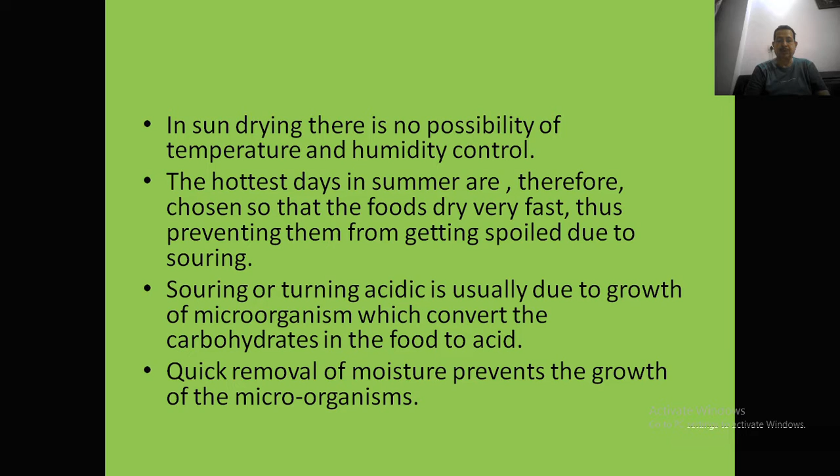Dehydration means the process of removal of moisture by the application of artificial heat under controlled conditions of temperature, humidity and air flow. In this process, a single layer of fruit, whole or cut into pieces or slices, is spread on trays which are placed inside the dehydrator.

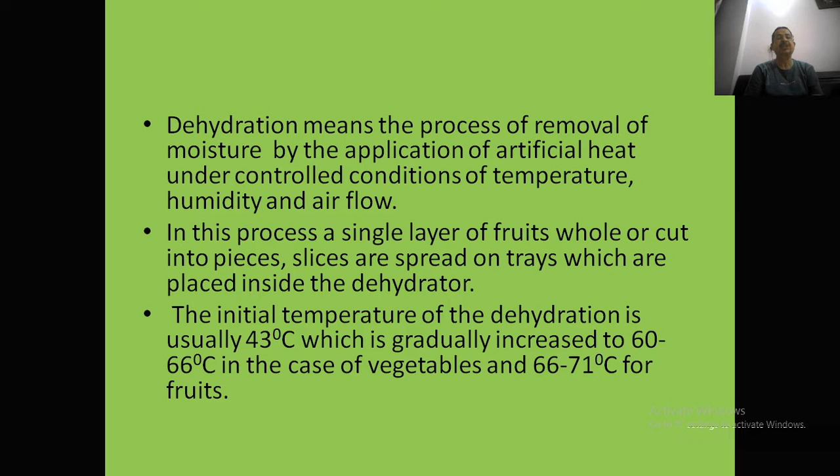The initial temperature of dehydration is usually 43 degrees centigrade, which is gradually increased to 60 to 66 degrees centigrade in case of vegetables and 66 to 71 degrees centigrade in case of fruits.

Then, advantages of dried and dehydrated foods. Dried foods are more concentrated than food preserved in other ways. Second, they are less costly to produce than canned or preserved foods because of lower labor cost and because no sugar is required. Next, due to reduction in the volume of the product, it requires less space.

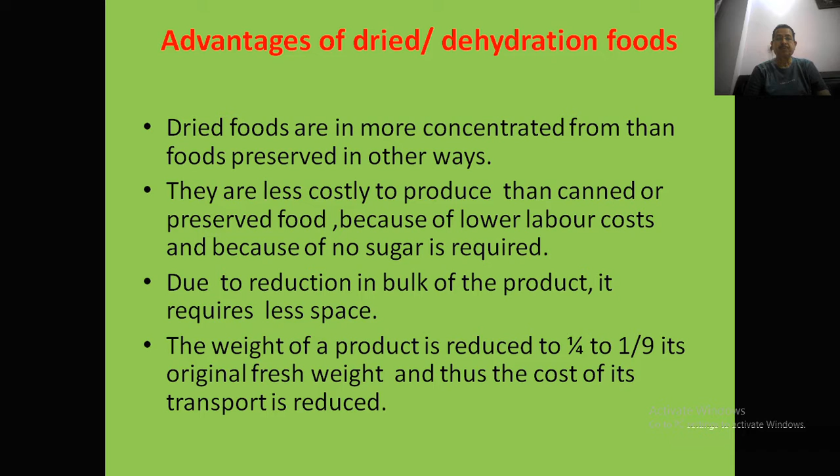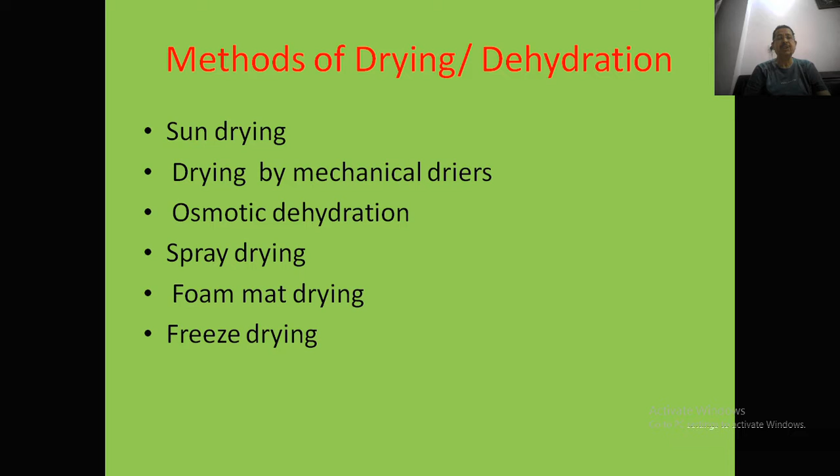Then the weight of the product is reduced to 1/4 to 1/9 of its original fresh weight, and thus the cost of its transport is reduced. Then the different methods of drying and dehydration are: sun drying, drying by mechanical dryer, osmotic dehydration, spray drying, foam mat drying, and freeze drying. These are the methods which are generally used for fruits and vegetables.

First is sun drying. This type of drying is used in tropical and subtropical regions where there is plenty of sunshine and practically little or no rain during the drying season. Sun drying is in direct or diffuse sunlight, that is, shade drying.

One of the earliest methods of food preservation, it is still used for the production of dried fruits and also for drying nuts. It was originally limited to fruits high in sugar content, which when harvested would dry naturally without hazard of loss from fermentation and molding.

Then the flow chart of the processing of drying of fruits. First is selection of the fruit. Fruit should be fully mature and ripened, free from blemishes, spots, and any disease and insect infestation. Then they are thoroughly washed. Then peeling is done by removal of the outer skin by lye peeling, mechanical peeling, steam peeling or other methods. Then preparation: they are cut into suitable size if required.

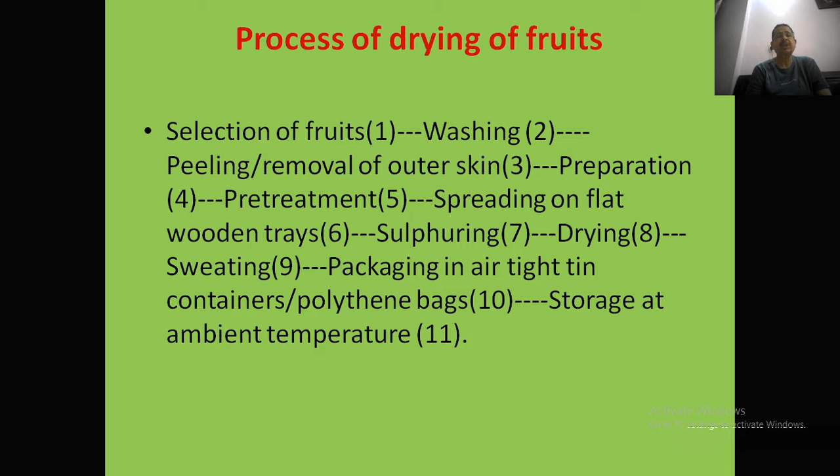Then sweating, where the moisture of the fruit is equalized. Then packaging in airtight tin containers or polythene bags. Then storage at ambient temperature. This is the flow chart of the drying of fruits.

First, lye peeling. In case of pre-treatment, lye peeling means dipping the fruits, particularly grapes and dates, in a 0.5 to 2.5% boiling caustic soda solution for 0.5 to 2.5 minutes depending on the nature and maturity of the fruit.

Hot lye loosens the skin from the flesh by dissolving the pectin. The peel is removed easily by hand. Any trace of alkali is removed by washing the fruit thoroughly in running water or dipping it for a few seconds in 0.5% citric acid solution.

Then sulfuring. Sulfuring is only done in case of fruits, not for vegetables. Sulfur fumes act as a disinfectant and prevent the oxidation and darkening of the fruit on exposure and thus improve their color. This phenomenon is generally seen in sliced fruits, which darken due to the oxidation of the coloring

matter. Sulfur fumes act as a preservative, check the growth of mold, etc., and prevent the cut fruit pieces from fermentation while drying in the sun. Vitamins in sulfured fruits are protected.

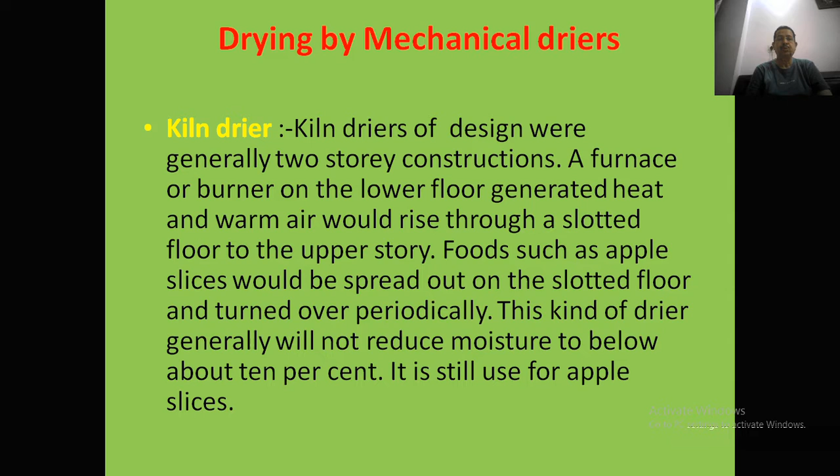This kind of dryer generally will not reduce the moisture to below about 10%. It is still used for apple slices. Then second is the cabinet, tray and pan dryer. Food may be loaded on trays or pans in a comparatively thin layer, up to a few centimeters. Fresh air enters the cabinet, is drawn by the fan through the heated coil and is then blown across the food trays to exhaust. In this case, the air is heated by the indirect method.

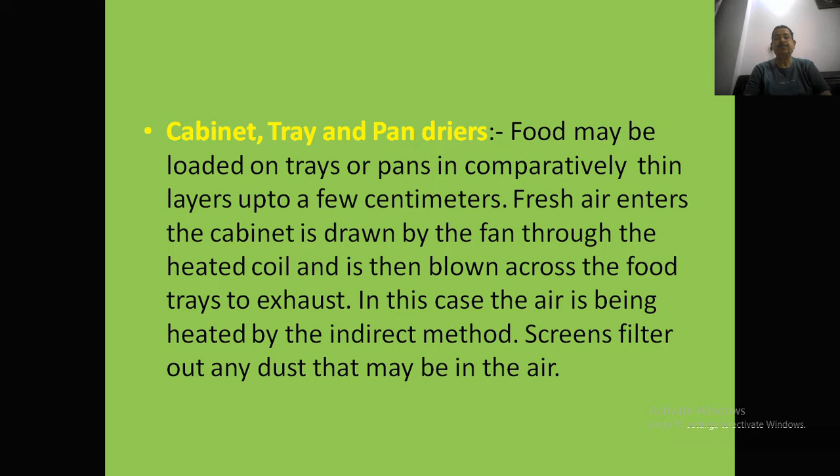Screens filter out any dust that may be in the air. The air passes between the trays in this design. The air is exhausted to the atmosphere after one pass rather than being recirculated within the system. The moisture-laden air after evaporating water from the food would have to be dried before being recirculated. It will soon become saturated and further drying of the food would stop.

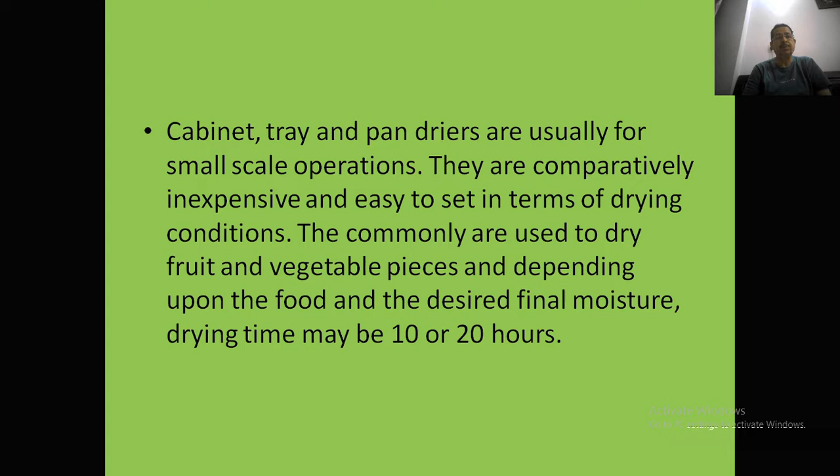Cabinet, tray and pan dryers are usually for small scale operation. They are comparatively inexpensive and easy to set in terms of the drying conditions. They commonly are used to dry fruits and vegetable pieces. Depending upon the food and the desired final moisture, drying time may vary, maybe 10 to 20 hours.

Then next one is the tunnel and continuous belt dryer. A main construction feature of the tunnel dryer has to do with the direction of airflow relative to tray movement. The wet food carts move from left to right. The drying air moves across the trays from right to left. Its significance is that the air, when it is hottest and driest, contacts the nearly dry product, whereas the initial drying of the entering carts gets cooler

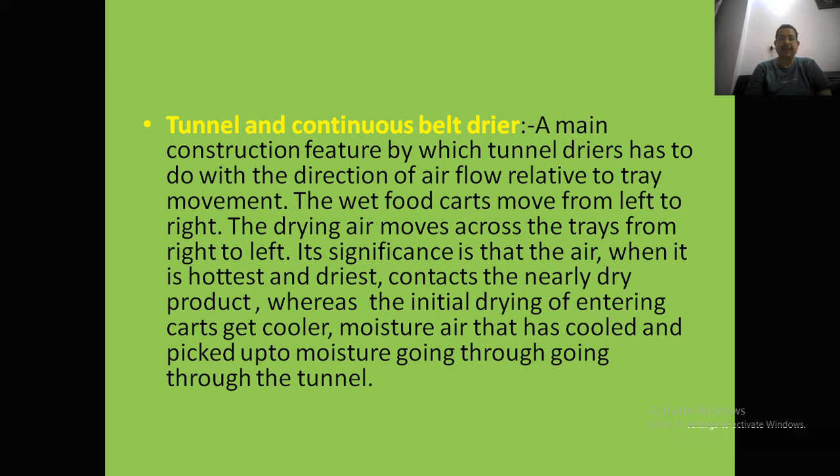moist air that has cooled and picked up moisture going through the tunnel. This means that the initial product temperature and moisture gradient will not be great, and the product is less likely to undergo case hardening or other surface shrinkage leaving wet centers. Further, lower final moisture can be reached since the driest product encounters the driest air.

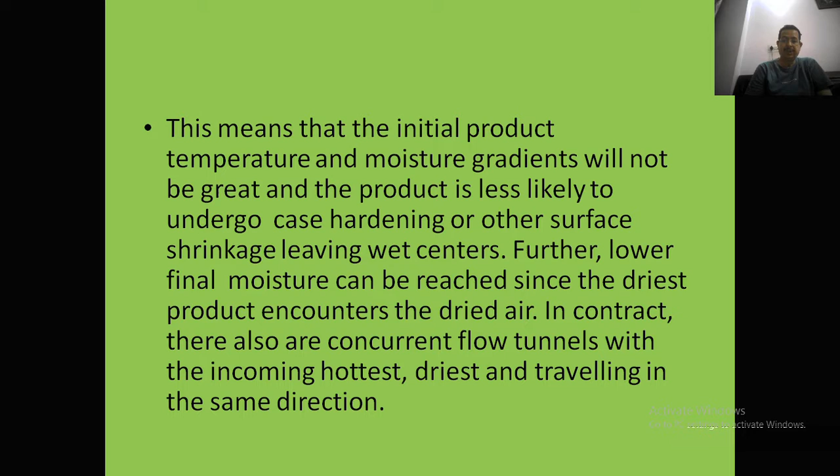In contrast, there also are concurrent flow tunnels, with the incoming hottest, driest air traveling in the same direction. In this case, rapid initial drying and slow final drying can cause case hardening and internal splits and porosity as centers finally dry, which sometimes is desirable in special products.

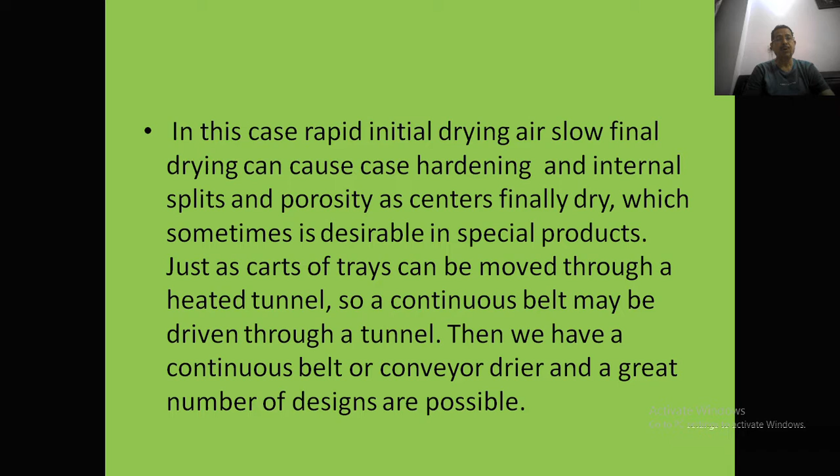Just as carts of trays can be moved through a heated tunnel, so a continuous belt may be driven through a tunnel. Then we have a continuous belt or conveyor dryer, and a great number of designs are possible. Then next is the belt trough dryer. The belt is usually of metal mesh, and heated air is blown up through the mesh. The belt moves continuously, keeping the food pieces in the trough in constant motion to continuously expose new surface.

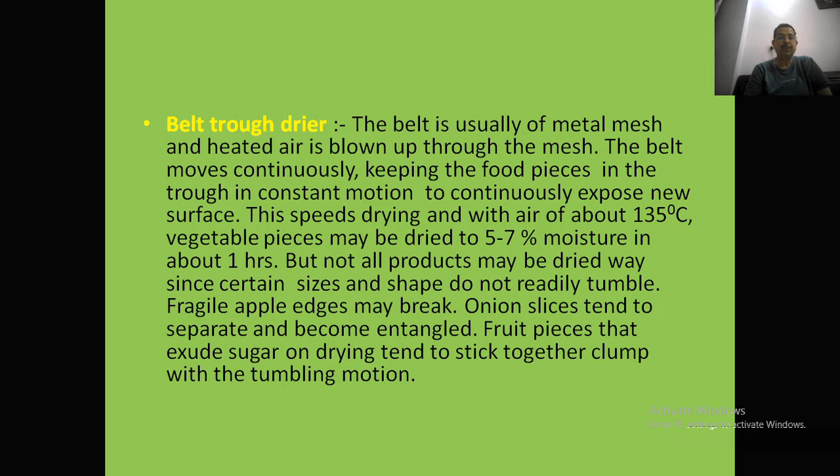This speeds drying, and with air of about 135 degrees centigrade, vegetable pieces may be dried to 5 to 7% moisture in about 1 hour. But not all products may be dried this way, since certain sizes and shapes do not readily tumble. Fragile apple edges may break, onion slices tend to separate and become entangled. Fruit pieces that exude sugar on drying tend to stick together and clump with the tumbling motion. Then next is the airlift dryer.

Several types of conveyor dryers go a step beyond tumbling to expose more surface area of food particles. These generally are used to finish drying materials that have been partially dried by other methods, usually to about 25% moisture, or at least sufficiently low so that the material becomes granular rather than having a tendency to clump and mat.

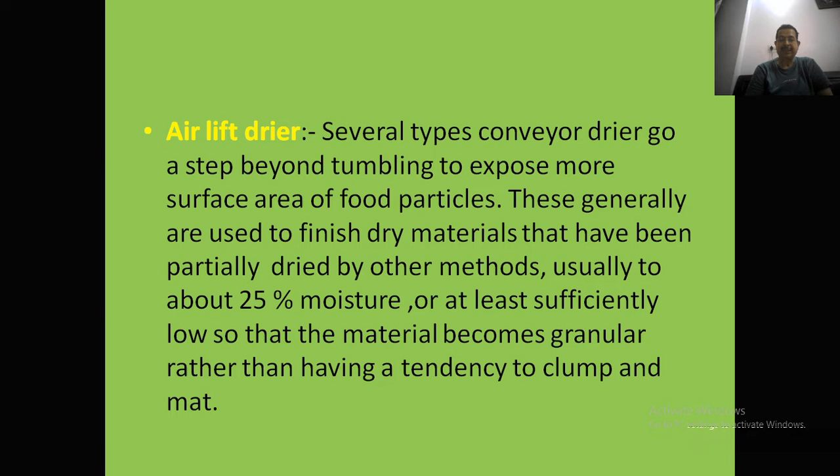The next method is air convection dryers. In this system, movement of air is generally controlled by a fan, blower and baffles. Air volume and velocity will affect drying rate, but its static pressure also is important since products being dried become very light and can be blown off trays or belts. The air may be heated by direct or indirect methods.

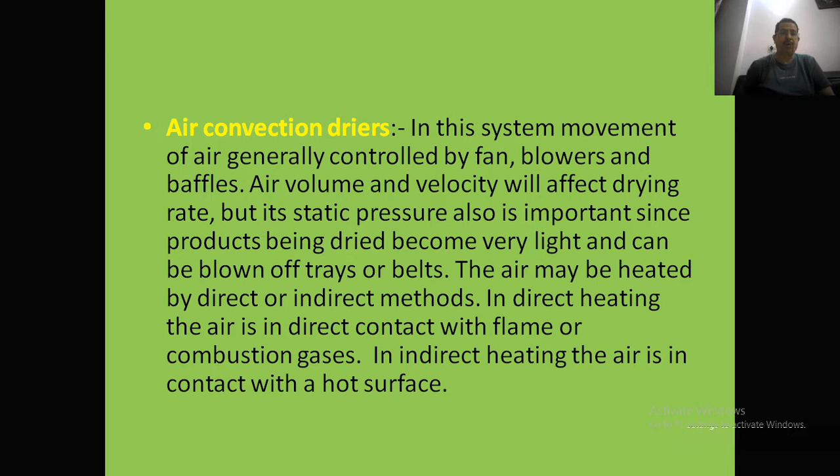In direct heating, the air is in direct contact with flame or combustion gases. In indirect heating, the air is in contact with a hot surface, such as being blown across pipes heated by steam, flame or electricity. The important point is that indirect heating leaves the air uncontaminated. On the other hand, in direct heating the fuel is seldom completely oxidized to carbon dioxide and water. Incomplete combustion leaves gases and traces of soot, and this is picked up by the air and can be transferred to the food product.

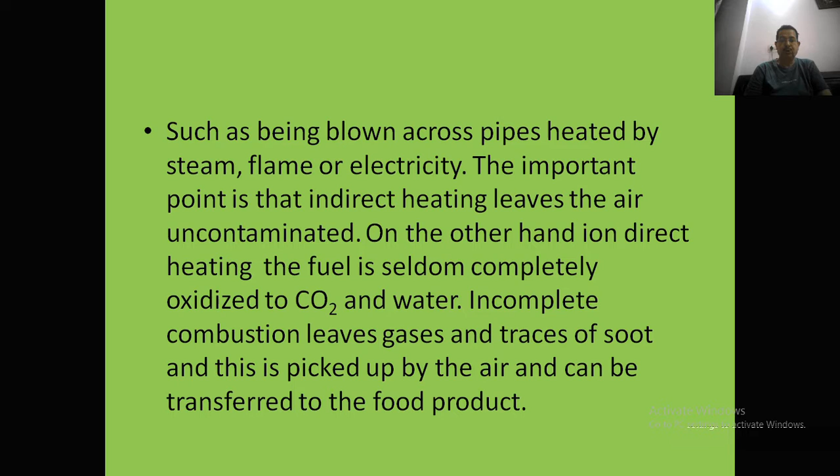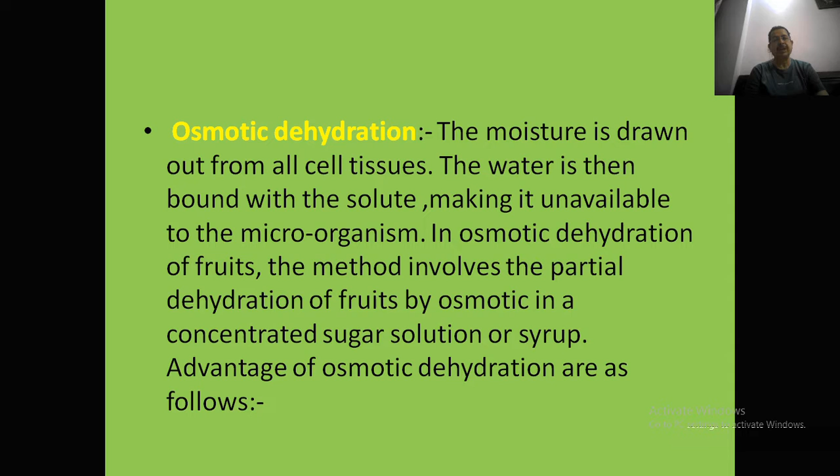The next method is osmotic dehydration. The moisture is drawn out from all the cell tissues. The water is then bound with the solute, making it unavailable to microorganisms. In osmotic dehydration of fruits, the method involves the partial dehydration of the fruits by osmosis in a concentrated sugar solution or syrup. The advantages of osmotic dehydration are as follows.

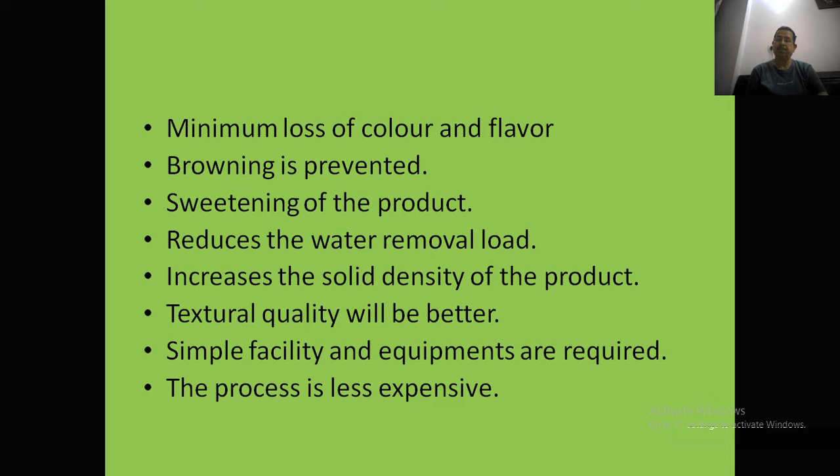First, it minimizes the loss of color and flavor. Next, browning is prevented. Then, sweetening of the product. It reduces the water removal load. It increases the solid density of the product. The texture quality will be better. Simple facilities and equipment are required for this method. And the procedure is much less expensive.

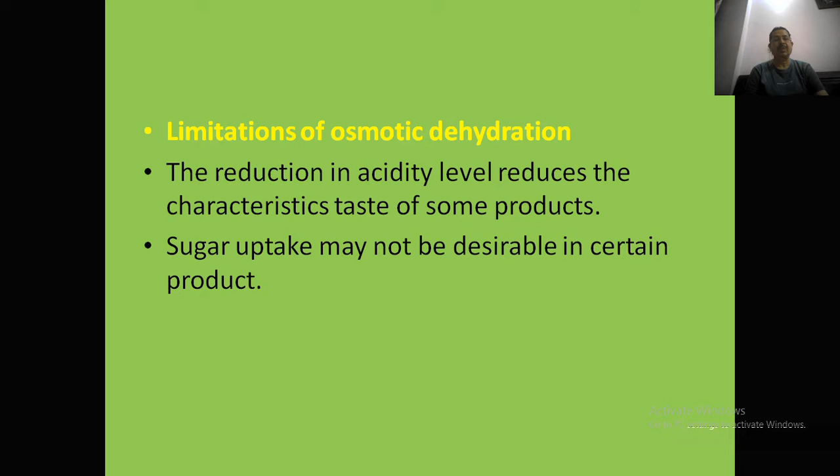Limitations of osmotic dehydration: first, the reduction in acidity level reduces the characteristic taste of some products. Next, sugar uptake may not be desirable in certain products.

The next method is the spray dryer. Spray dryers turn out a greater tonnage of dehydrated food products than all the other kinds of dryers combined. There are various types of spray dryers designed for specific food products. Spray dryers are limited to foods that can be atomized, such as liquids and low viscosity pastes and purees. Atomization into minute droplets results in drying in a matter of seconds, with common inlet air temperatures of about 200 degrees centigrade.

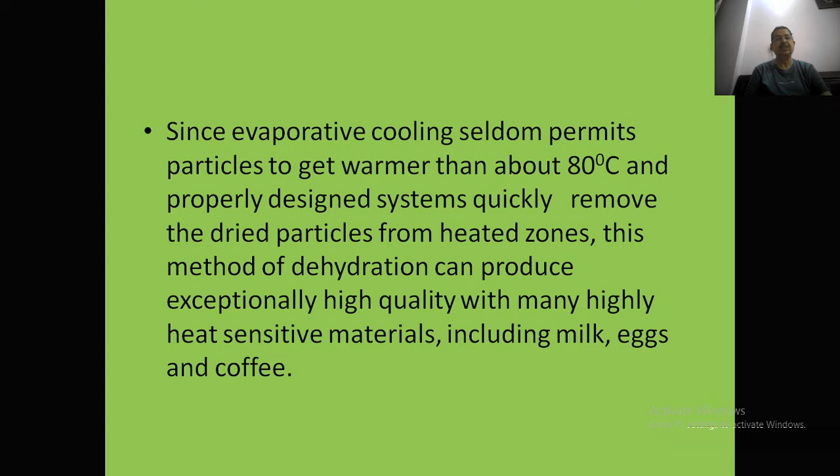Since evaporative cooling seldom permits particles to get warmer than about 80 degrees centigrade, and properly designed systems quickly remove the dried particles from the heated zone, this method of dehydration can produce exceptionally high quality with many highly heat sensitive materials, including milk, eggs and coffee.

The next method is foam mat drying. The foam is deposited on a perforated tray or belt support as a uniform layer approximately 3 mm thick. Just before the perforated support enters the heated oven, it is given a mild air blast from below. This forms small craters in the stiff foam, which further expands the foam surface and increases the drying rate. At an oven temperature of about 82 degrees centigrade, foam layers of many foods can be dried to about 2 to 3% moisture in approximately 12 minutes.

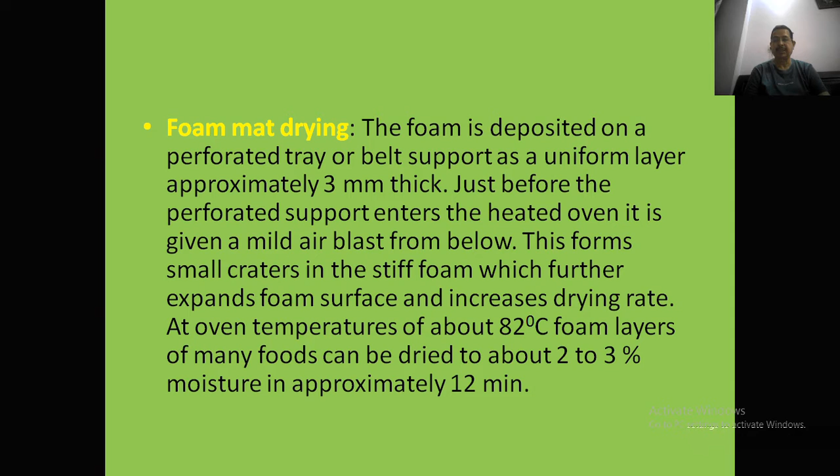Next is freeze drying. Freeze drying can be used to dehydrate sensitive high value liquid foods such as coffee and juices, but it is especially suited to dry solid foods of high value such as strawberries, chicken dice, mushroom slices, etc. These types of foods, in addition to having delicate flavor and color, have textural and appearance attributes which cannot be well preserved by any current drying method except freeze drying.

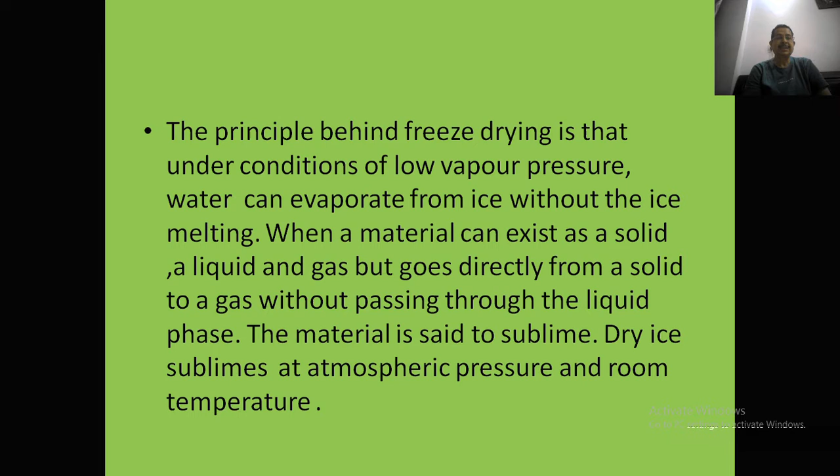The principle behind freeze drying is that under the condition of low vapor pressure, water can evaporate from ice without the ice melting. When a material can exist as a solid, a liquid and a gas but goes directly from a solid to a gas without passing through the liquid phase, the material is said to sublime. Dry ice sublimes at atmospheric pressure and room temperature.

Frozen water will sublime if the temperature is 0 degrees centigrade or below and the frozen water is placed in a vacuum chamber at a pressure of 4.7 millimeters or less. Under such conditions, the water will remain frozen and water molecules will leave the ice block at a faster rate than water molecules from the surrounding atmosphere re-enter the frozen block.

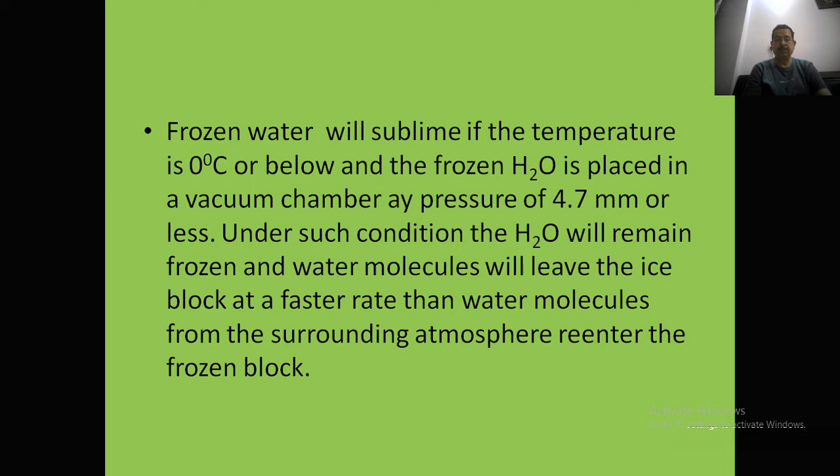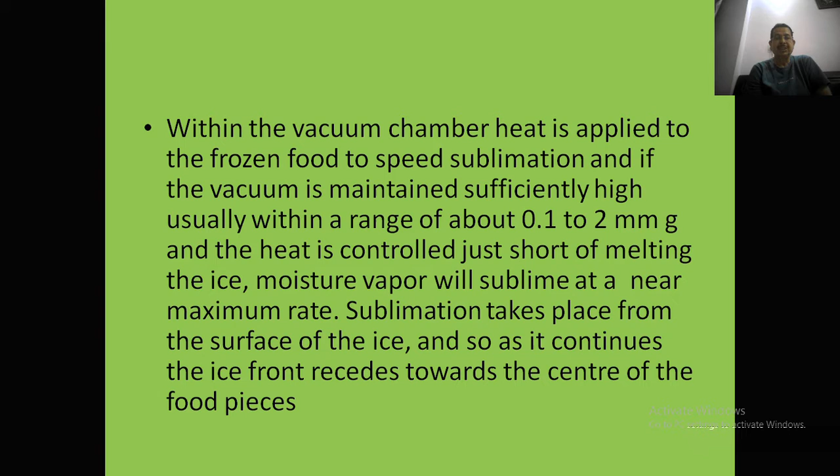Within the vacuum chamber, heat is applied to the frozen food to speed sublimation, and if the vacuum is maintained sufficiently high, usually within a range of about 0.1 to 2 millimeters Hg, and the heat is controlled just short of melting the ice, moisture vapor will sublime at a near maximum rate. Sublimation takes place from the surface of the ice, and as it continues the ice front recedes towards the center of the food pieces.